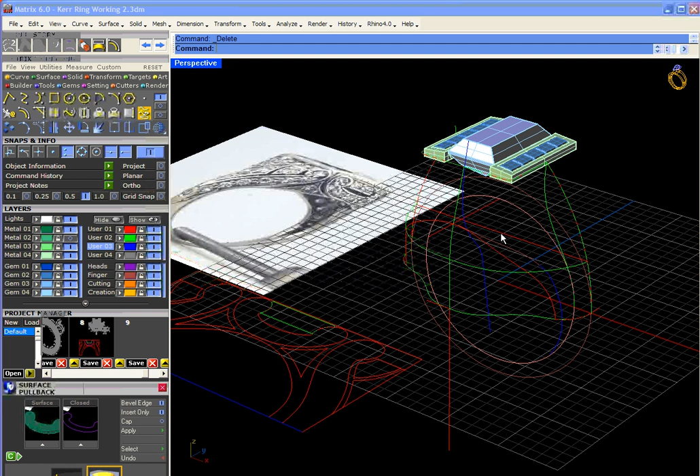Okay, here's a model, and it looks like there's quite a bit going on. Let me hide some of this.

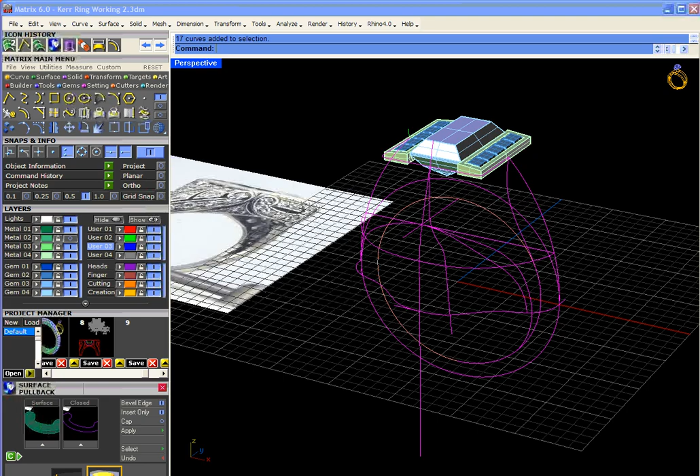But it's really more of the same type of surface modeling that we've been doing for a while. So let's look at the first thing we have. Let's go ahead and hide all this stuff too.

I've got the finger rail. There's a big, it's actually a big baguette. Here's the ring, here's the side view. Got a curly Q thing. Couple gems here.

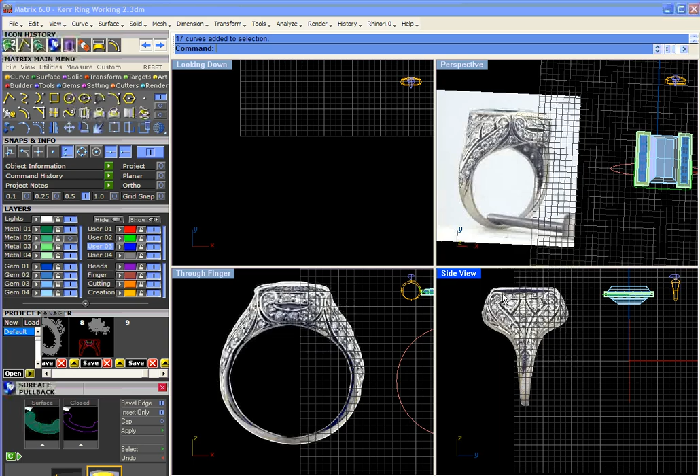So there's that there. There's a corner piece here, triangular, and then it comes down here. Another curly Q down into the shank. Got a center piece, a little section here, and then a bar across here.

Let's see, here's the top. There's the top there with emeralds in it. Okay, so there's what we're looking at.

And the whole goal of this project is to make a surface such that we can use flow along surface and put all this stuff up onto that surface, and not have to piece this thing together one section at a time.

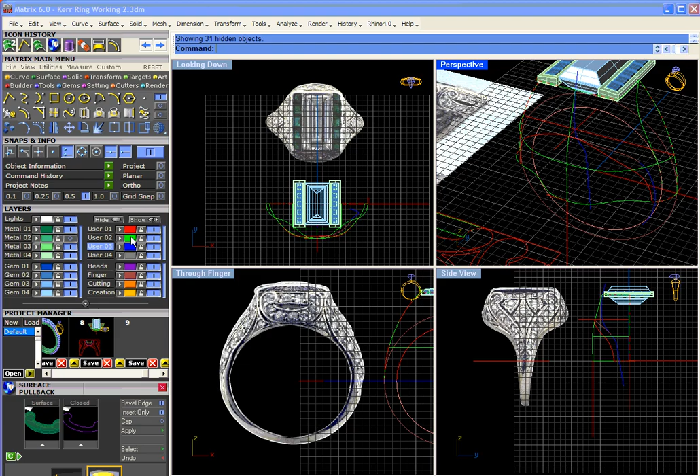So let's go ahead and hit show, and let's go ahead and turn off some layers here. One of the first things that I did is offset the finger rail, and I always offset that to the thickness right here. A lot of times it's 1.8. It all depends on what you're building.

This curve I didn't actually even use at all. Okay, so then...

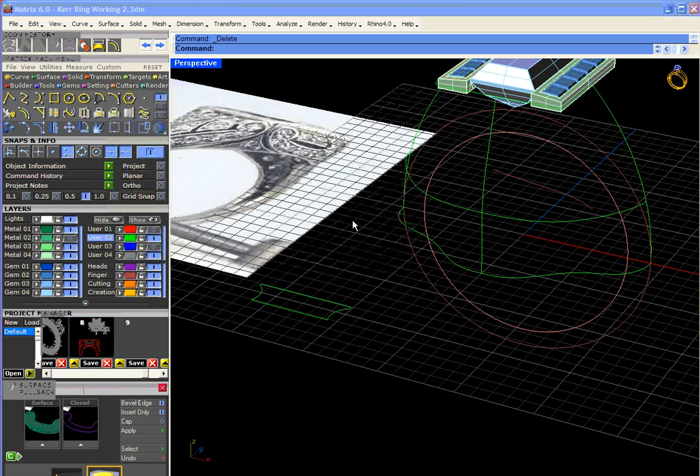We've got a curve that goes, here's how I always do these: arc direction, snap here, come up to here, and then hold down shift for ortho so that it comes tangent to this point right there, like so.

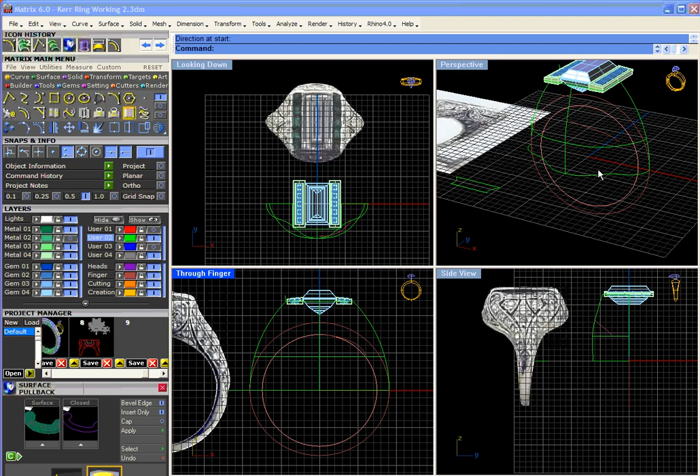Okay, and so there's that, and then over here, well, up on top is just a filleted corner, just straight over this way with the filleted corner.

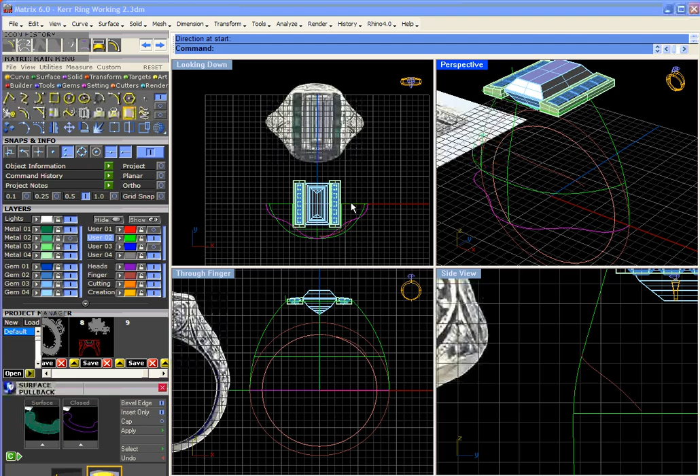Okay, then down here, this part is a little trickier, and in order to do that, it's another arc direction. I'm going to draw it over here. I start here, come over this way, ortho again, and then over here in the middle, let's turn on it, there's a tick mark here.

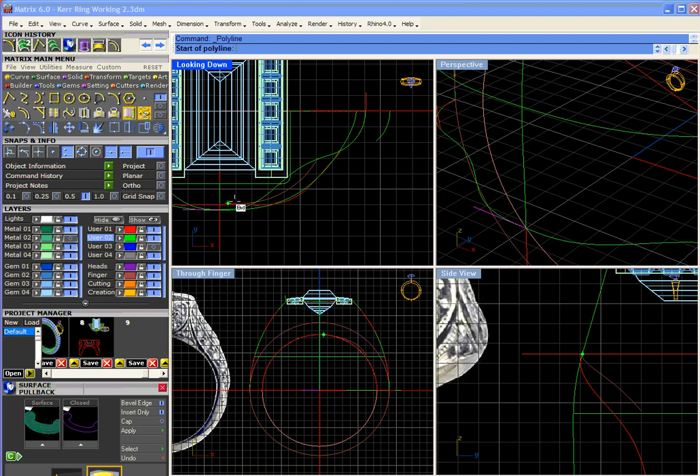So anyway, let me move this one out of the way. So there's that, and then over here in the middle is this tick mark, like so. And then we blend from here to here.

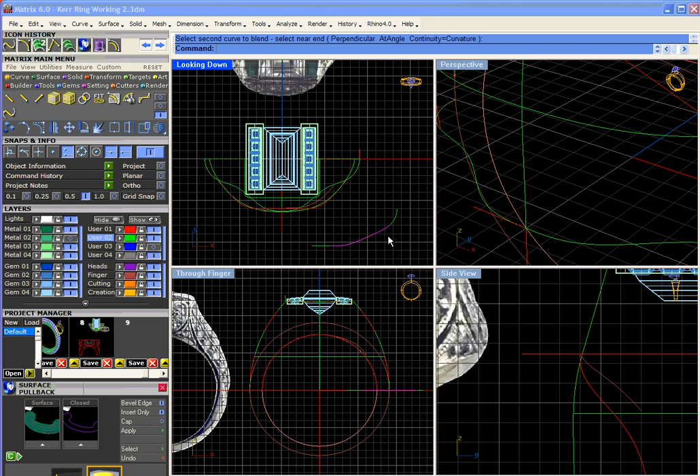And in this case, depending on how far over this comes, the blend actually goes in and back around, which is actually a good thing, because at the bottom I want this to be coming in skinnier.

Okay, so when you blend from like, actually it's from this curve here, when you blend from there, let's actually get rid of that one, there we go. So from in here and then blend over to this one, you get that.

Then what I did is I went ahead and did a blend from here, this curve, to this tick mark here, and you get this one.

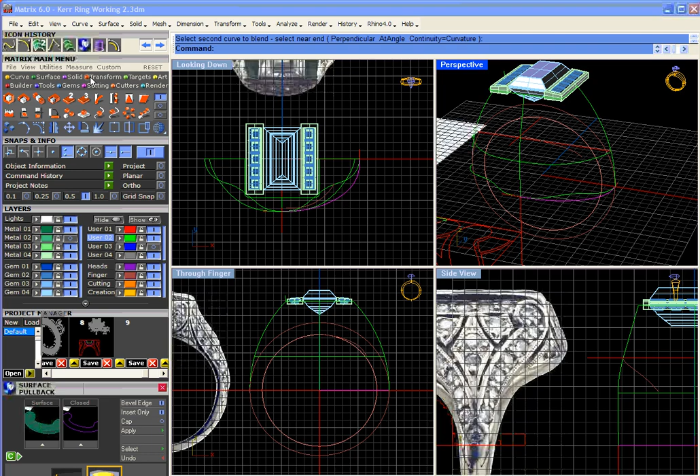And I went ahead and located it up here. And the reason is this, well, I'll show you. Let's orient that up there. Orient 2, 1, 2, and then it went up here from there to there.

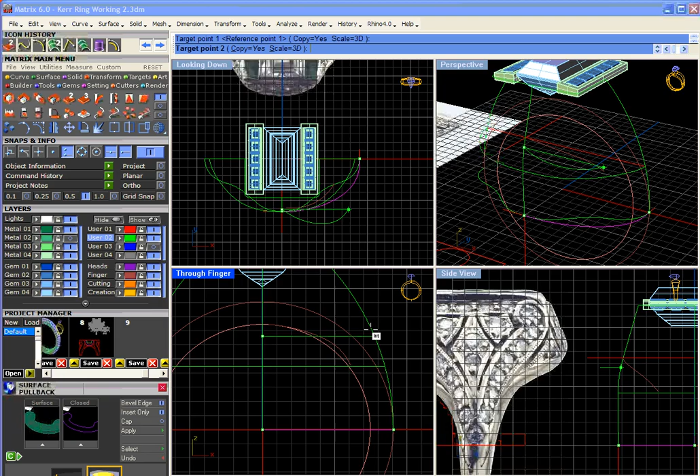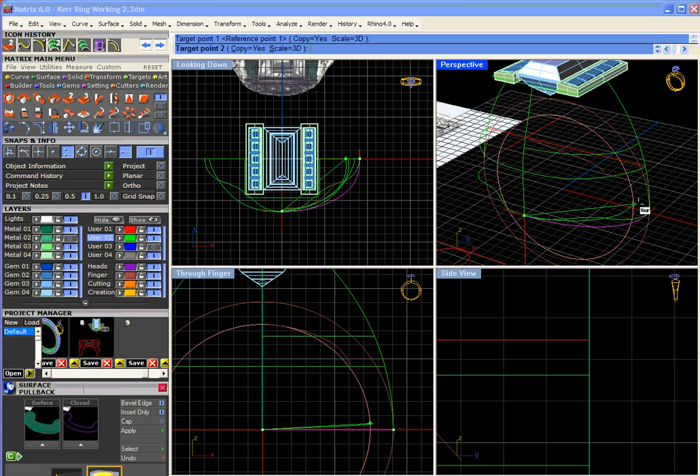Let's hold down shift for intersect. There we go. Alright, let's do that again. Let's go up here. I'm having a heck of a time getting that over there. There we go, get that straight there. Okay, so that's how I got that up here, like so.

And then, of course, I mirrored all this. Now, the reason that we do this section is this. Once we have this set up, oops, let's do that and that.

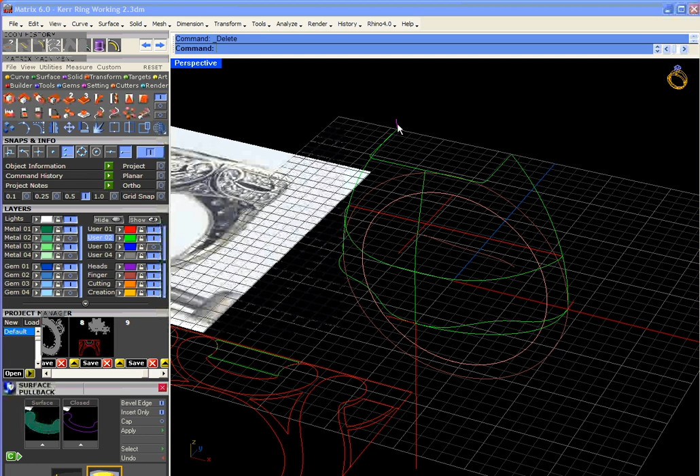All right, once we have this set up, we're going to do a curve network. I don't know what that is either. Okay, oh, and I also have a line that came down off here, this line here, and then I had a line drawn that way.

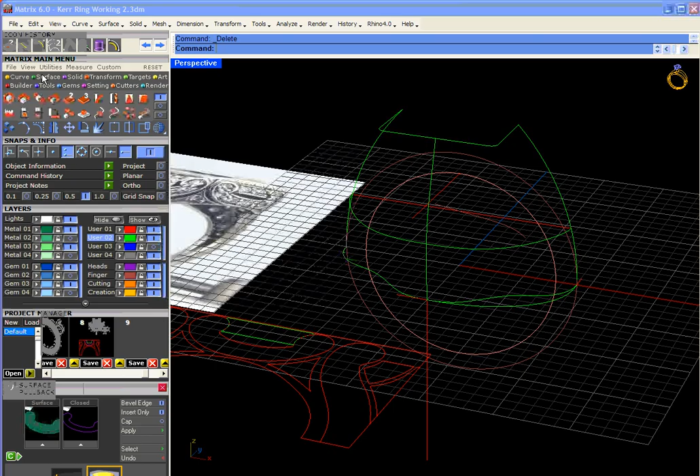Okay, and then this was a blend down to here. Now, if we do surface, you notice I'm working in 6 WIP too. I didn't really do anything in here that you couldn't do in 5.4, I guess, yet.

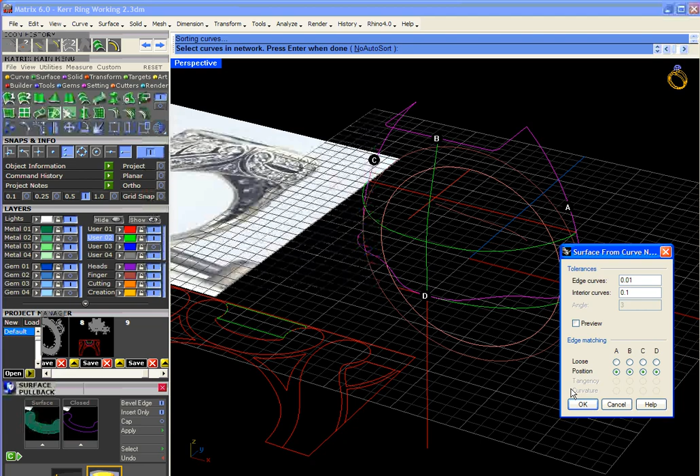Here's curve network, and if we pick this curve, this edge one, and this one, the original one, and hit enter, then we get this surface. And you can see that it kind of bows in and tucks in.

And that's really not what I want, because in the side view, it goes out. So that surface is no good. So then, this one's not the one I'm using. So then...

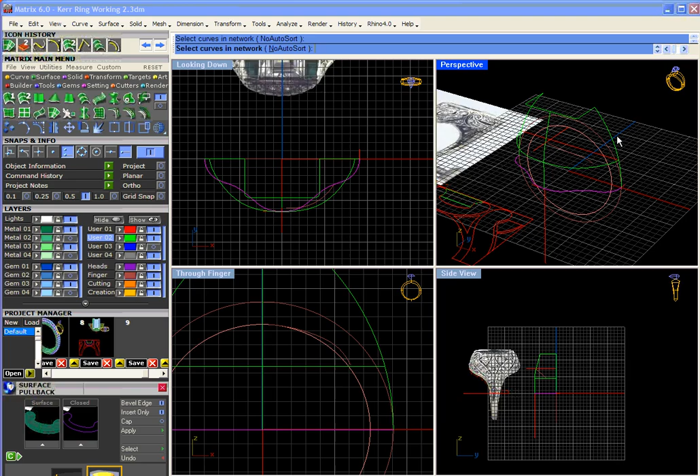If we have another line here and another line here, then let's go ahead. Now this one, we'll skip that one and show this. So there's this surface, and it does come out, but it comes out very quickly, and I don't get a good surface here for this triangle that I want, because this dips into this corner. So that's still no good.

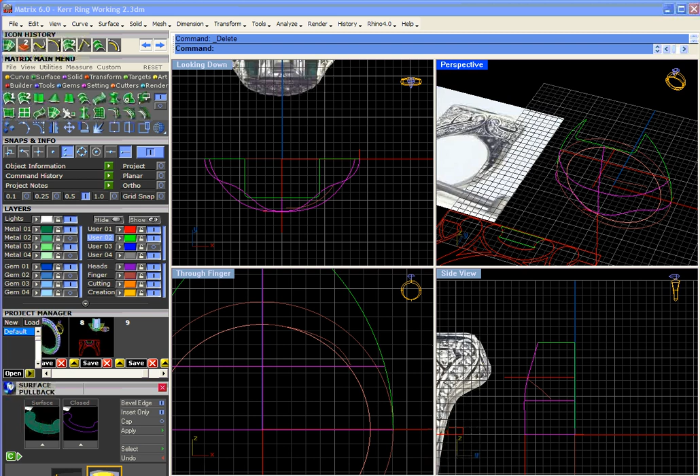So then I drew this one that we oriented just a second ago, so that it would bow out there. And so with all those selected, then it comes out more before it goes down in. So you see this is nice and puffy out here, and that's how that surface was made.

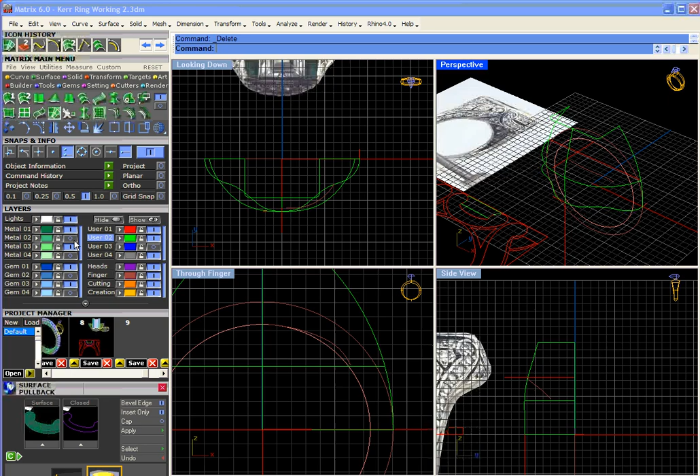And I think that surface lives on this layer right there. Yeah, now let's go ahead and bring this back.

The next thing we do is take and extrude this finger rail on out, like so. And then this one gets split by this one. And we split that, and that's how we got to this surface right here.

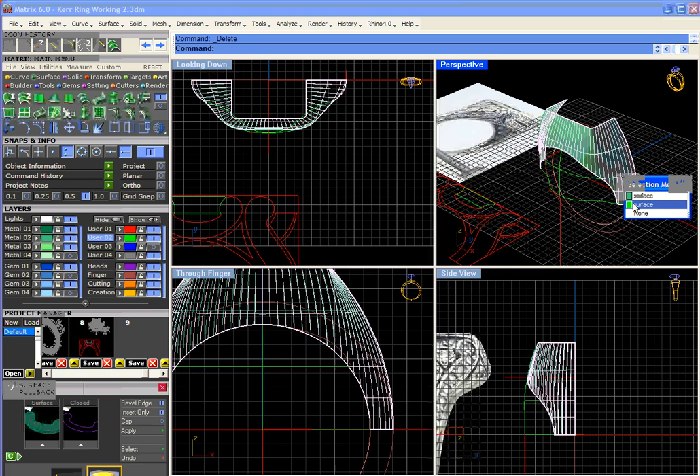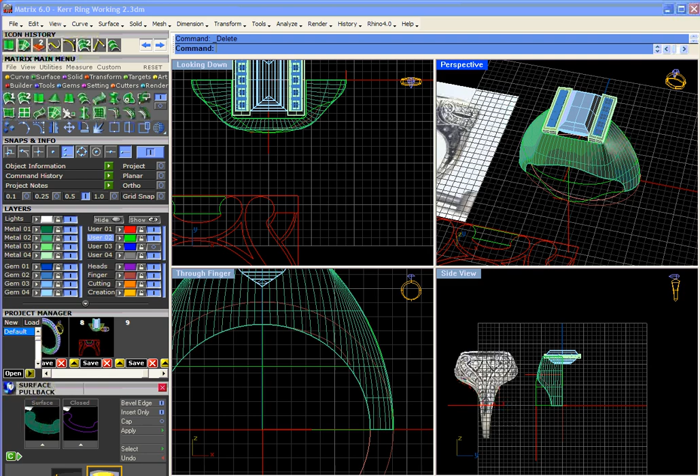So now we can see that we have this kind of shape here. Perhaps mine isn't quite as exaggerated, although I ran out of room. With the top that was already sent to me, I really couldn't go out any further. Maybe this bows out more, but not a whole lot. As a matter of fact, let's just see what we got here.

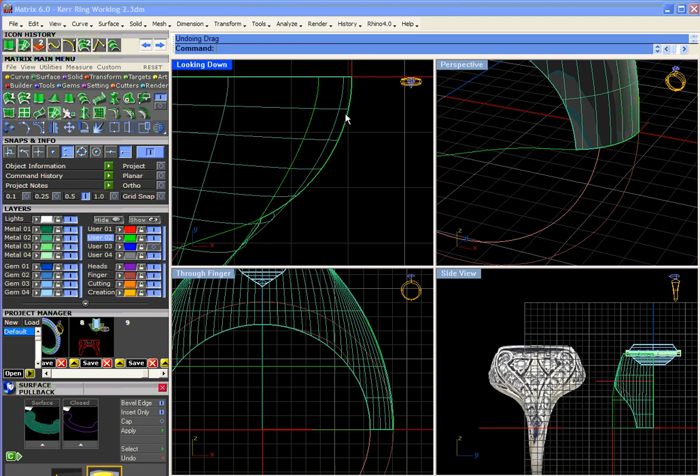Yeah, the dynamic is a little bit different, and it needs to tuck in more this way, which means that this curve here would need to be drawn shorter, quicker. Instead of coming out this gradual, it would need to come in quicker, which we could certainly do.

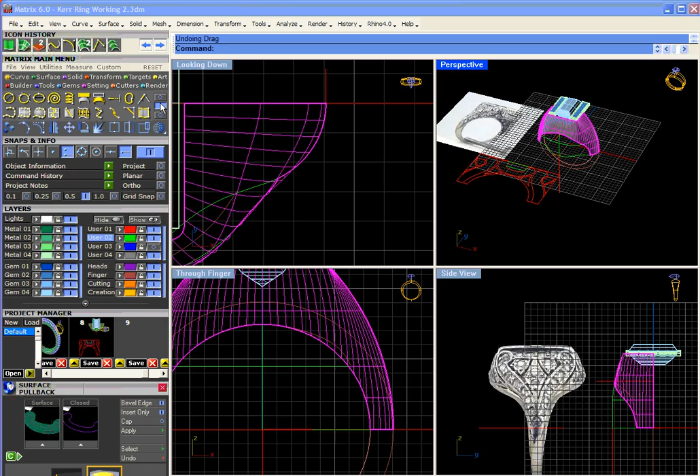Okay, so having done that, the next thing that we do is we select this and go to curve, and where is it, next one down. Here's create UV curves, so we select that.

So then we have two curves. We have this curve that represents the trim, and we have this curve that represents the overall surface. I don't need that one because the trim surface is what I'm heading for. Okay, then...

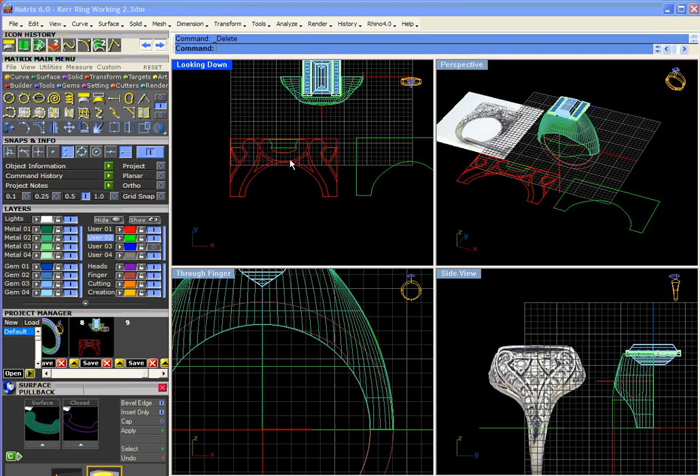We fill this shape with what we see here as far as all the shapes. So the first thing that I did is I like to just draw circles like so, to make something like this one.

And we'll go ahead and mirror this to the other side. Turn near off, turn mid on. And then it's just a matter of getting this right as far as, let's draw mid here.

Okay, and then we'll split this with a point at the quad there, and we'll go there, anywhere really, and then we'll blend from here to here, about like so.

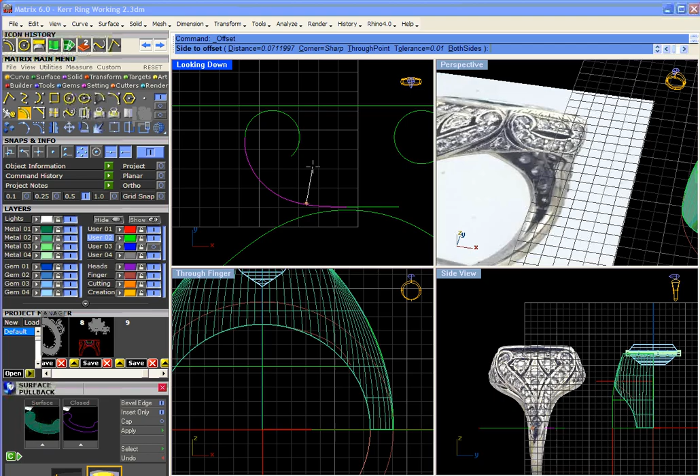Then we might have to turn on some control points or something to get exactly what we want. So there's that. Then I like to come here and come back with an offset, and we'll go T for through point, like so.

And then a lot of times what I like to do is draw a circle like this. And rather than use fillet, a lot of times I'll just control this with blend the way I want it.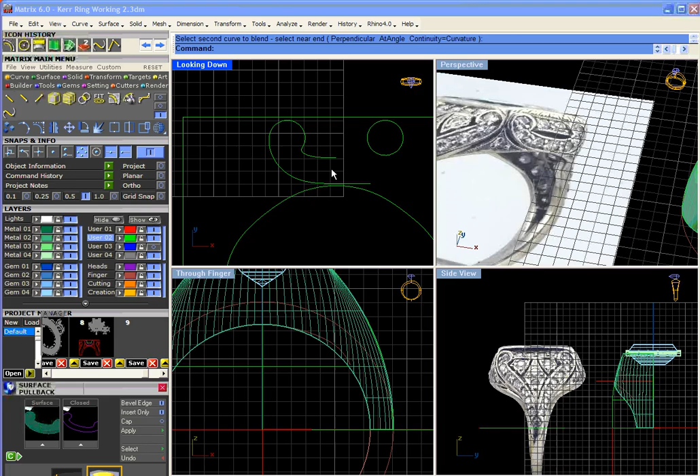So I use a circle to trim out a corner, and then I just blend it in there. And sometimes that's a better solution than fillet. All depends on what you're doing. So there was that. Then we mirror like so, and that's how you can get some of these shapes really pretty quickly.

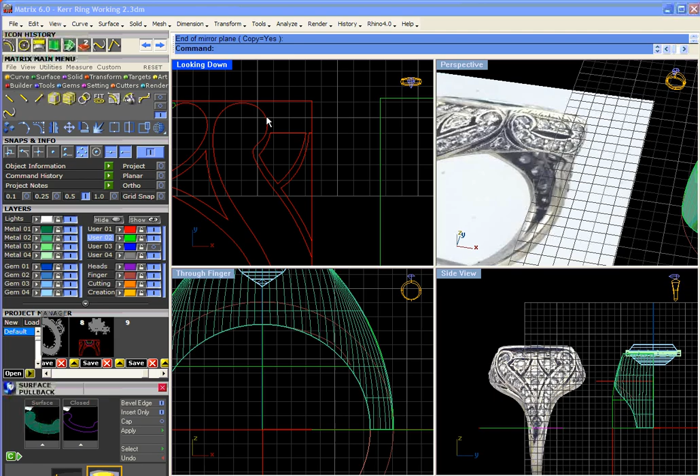And then to make like this triangle, once I have this piece drawn in there, and let's see, this is this piece here, and then this piece comes over and down in here, and it's kind of hard to tell on this thing.

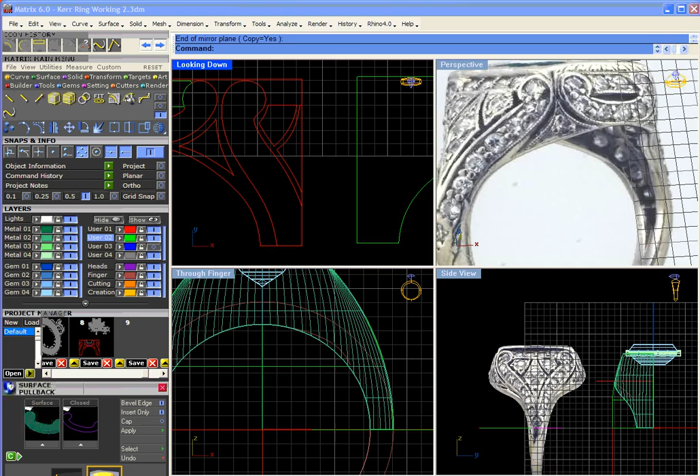It is pierced. Okay, so like this is a hole. This certainly appears to be a hole, but it looks like it ends right there. And so there's some holes in here that are pierced, but otherwise this is all metal, and when you look at it in the thumbnail you think, well, that's pierced, but it's not.

It's a dark reflection. And so there's metal, and you can really get a feel for how much metal is in there in this view. There's a lot of metal hanging out down in here holding this thing all together.

Okay, so but anyway, then what I did is I went in and, to make shapes inside of other shapes, you obviously use offset. So you just go through the thumbnail and you offset this one here, and then you offset this one here, and through a series of offsets and then a little bit of manipulation, then you can make this shape.

Okay, so there's the design laid out. The only one I don't have is this section here where there's 4 gems. It actually starts here and goes over and comes across and ends here.

So there's that, and really what we may want to do is, because pieces span across other ones, it may be such that we would want to do the whole ring. So let's take a look at that.

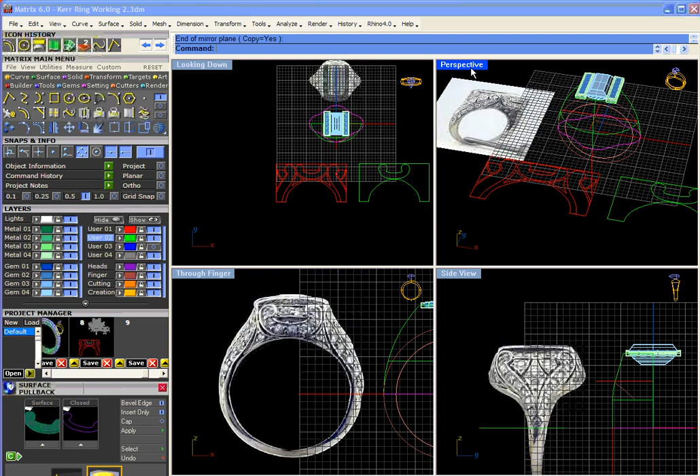You notice too, I'll take the time to say, if people have never used curve network, this is the best way to set up a curve network, with 4 edge curves. Okay, we got the 1, 2, 3, 4, and then you can put stuff spanning across inside it, like this curve and this curve, to define what the shape does. But anytime out here, if you get 5 curves, it doesn't work.

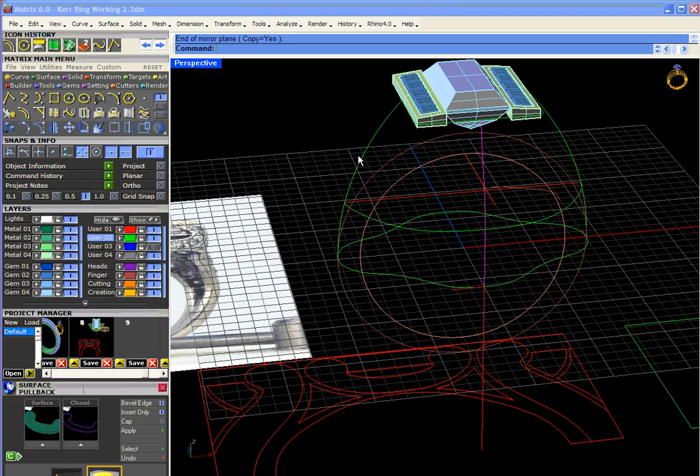The relationship is generally 4 curves. I mean, it could be 3 too. But now what we'll do is join that, mirror this, join that. Oh, let's do, yeah, mirror this.

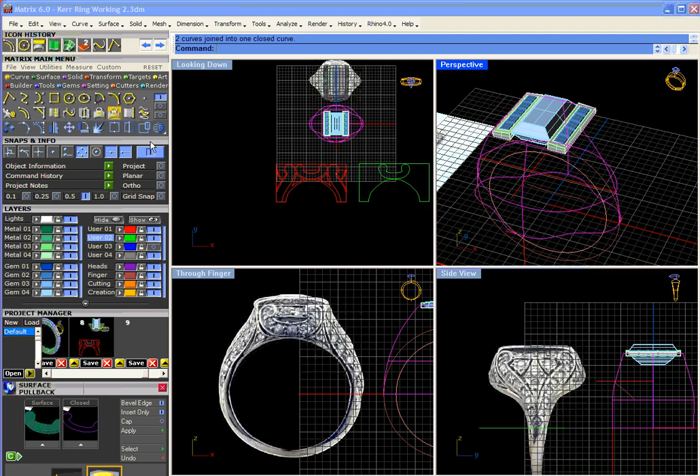Join that. Okay, so now we'll do all of this. There's the curve network, which is, of course, here.

So now, let's see, we'll extrude this out in both directions. This one gets split by this one. Gets split by this. Okay.

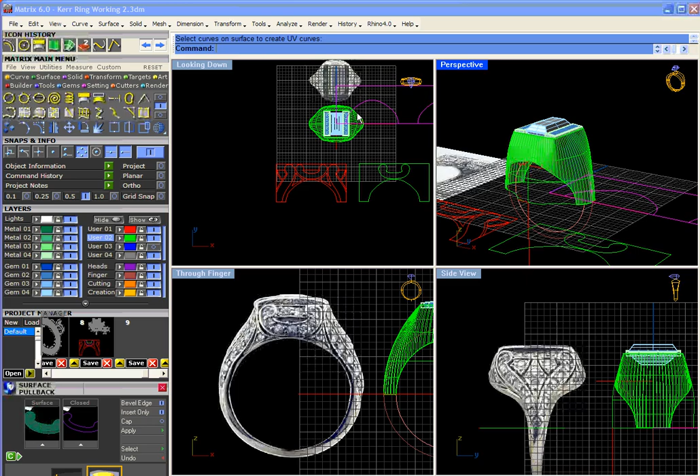So now we go to UV curve, and of course we have the same thing, only it shows both, like so. And we'll go ahead and put all this business in there. So let's go ahead and go duplicate from this corner to there. And then of course we'll duplicate from this corner to here.

And that doesn't look like that matched up at all. But let's see what happens. Okay, let's go apply up to here. Yeah, this one matches up. There must have been something wrong with the way I did that.

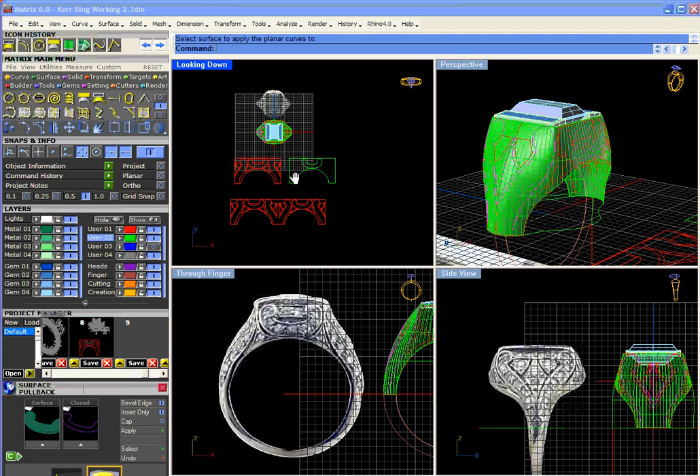Which makes me wonder if we take this and this and this and this, and that. Let's turn that off. Okay. Let's go ahead and mirror this to the other side and see what's going on.

Yeah. Well, we'll just need to fix it. Oh, I see, it is off. Let's just undo all that.

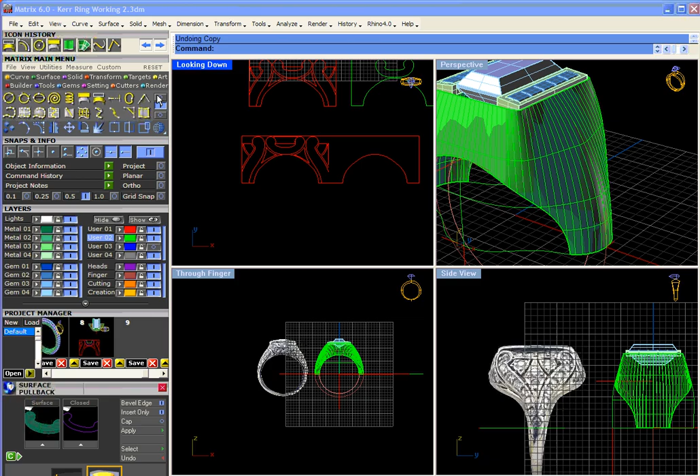And then we'll go ahead and draw a line from the mid of here. Yeah, there's where we're off. This doesn't equal this. So that's cool.

Alright, let's see. So we'll select all this business. And we'll do a 1D scale from this right there to this right here until we hit the intersect point right there. Okay. Yay.

We'll mirror this to the other side, like so. We'll explode that, explode this. There we go. Join that now.

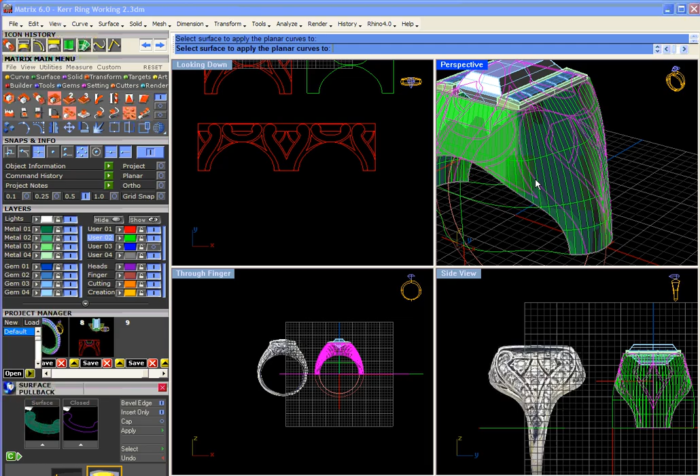And if we put this up here, put that on this layer. And there we go. There is that section up on there.

Then the beauty of this is that now we would go ahead and let's just do some panels here. Now the tricky part is that this has to keep going down and around here, which means we need their surface to come down further, but I'm going to mess with that in a minute.

As a matter of fact, I want to try this. This I have not tried yet. And with flow, we're going to use flow along surface.

Alright, let's go ahead and go blend from here to here, and that is going to be this shape here. Alright, and how far down that comes is up to us. And let's go ahead and blend that again from here to here.

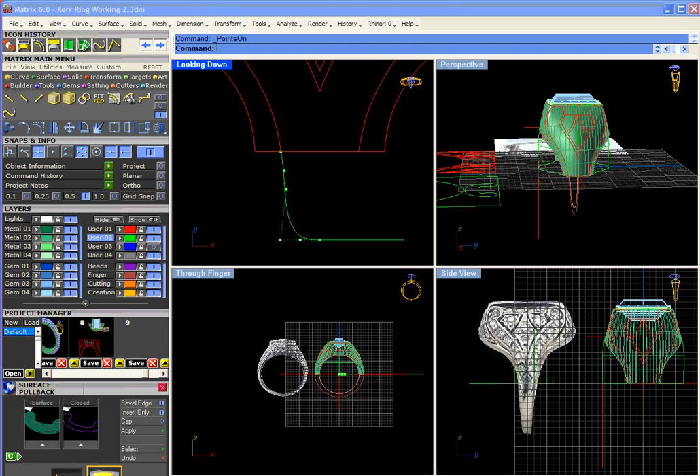There we go. And if we want this to be a bit pointier, then we just select those and do that. So there's that part. And then we mirror like so. Okay, so there's that. Join. Where's that? There it is. Okay.

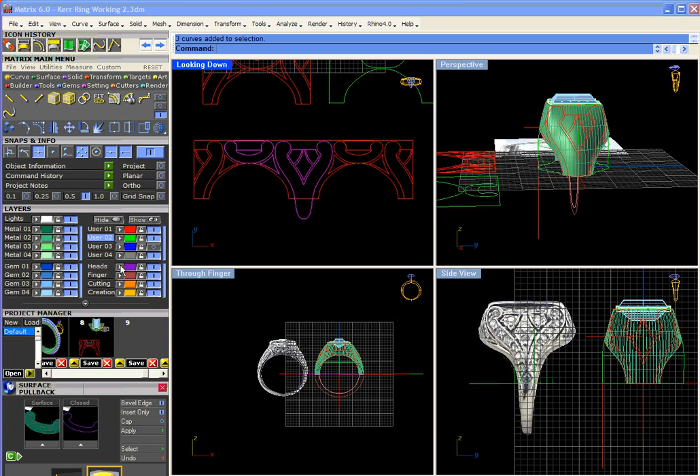At this point, we'll go ahead and do just what we need. So we need these shapes here. Those are the only unique ones. Let's put those on, and let's do orange.

Okay, so if we select these orange ones, and let's go ahead and extrude those, not both directions, but just one, and let's go -1 millimeter. I don't know if that's thick enough, but I'm not going to worry about it quite yet. Okay, so now we have that extruded down there.

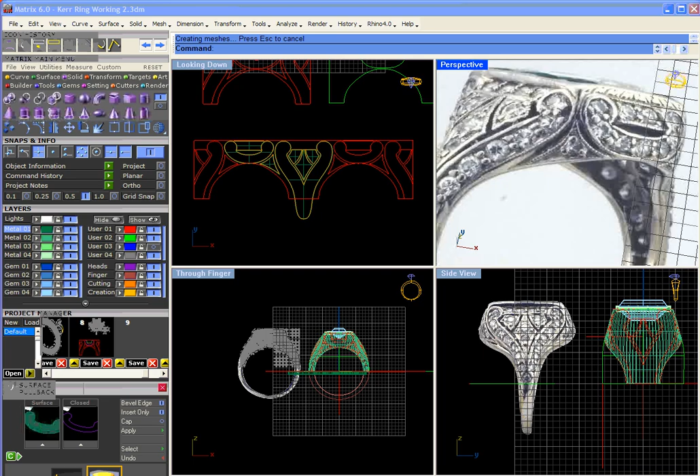And ideally what we would want, I think, is we have a lip going across here where the milgrain is, and then a wall that would slant down to a recessed pocket for all these stones to sit in.

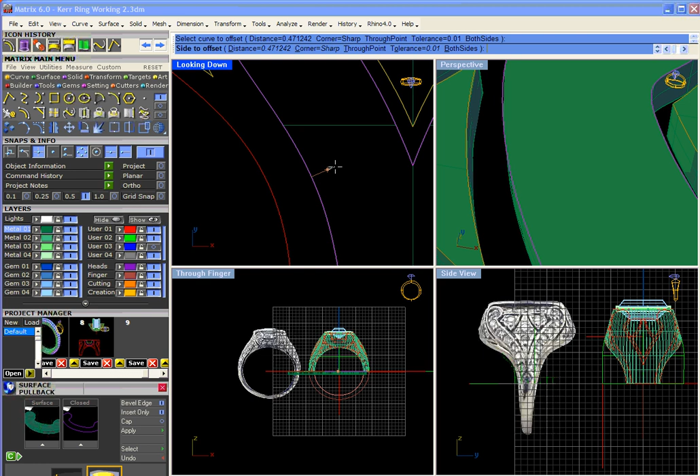Okay, so let's go ahead and select the orange, and we're going to offset the orange. Offset - oh, we can only do those one at a time. There's that. And let's pick a particular distance. Let's say 0.4. Okay, so there's that offset.

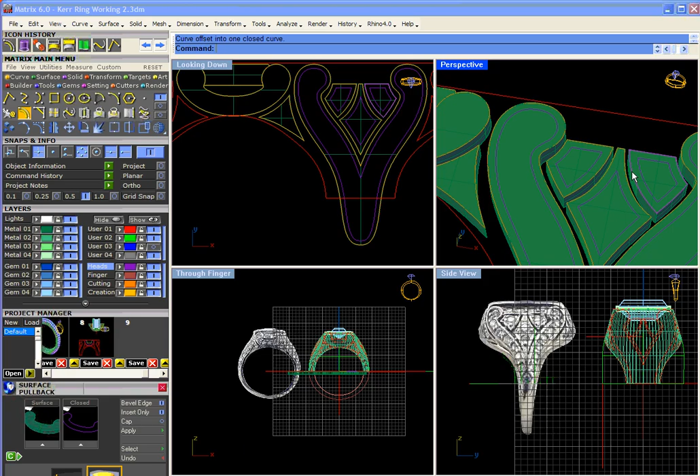And we'll go ahead and put that on purple. And then we're just going to go through here and pick each one of these and do the offset. Oops, let's put those on purple though. Curve, offset. Offset there. Offset this way.

Okay, then we'll take this purple one, and offset it again. Now here's the deal, that would be we do have an inset builder right here.

It's called surface pullback, and it works quite well on some more complex shapes like this one. It sometimes fails. Also, it has trouble with - it extrudes to a point, and so when you're using it way out here on a flat, the point that it extrudes to is far, which is a real drag, because then the walls of what you're doing all go in.

So unfortunately, if I was going to do them straight, it wouldn't be a problem. But I want kind of a draft angle to this wall, so I'm going to have to do these by hand. So let's go over and we're going to offset through point, and it's not a whole lot, just a bit.

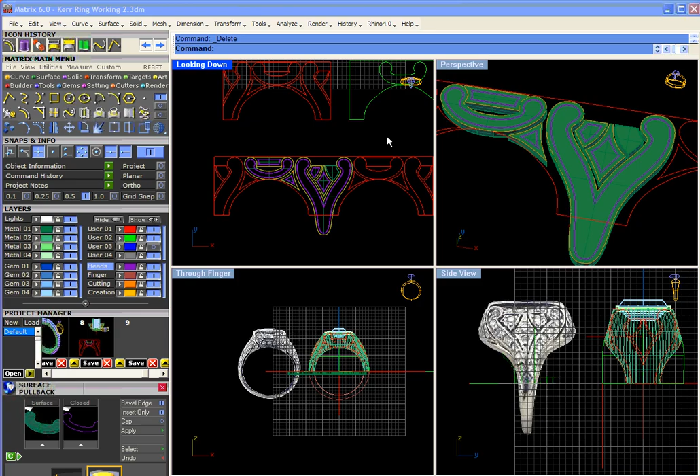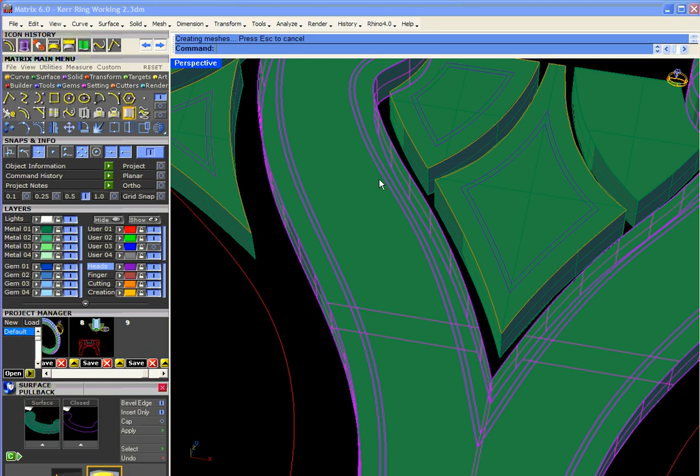Okay. So now what we're going to do is come in here and we're going to say that one gets split by this and this. Enter. And this one split by this. This one split. And so we're splitting.

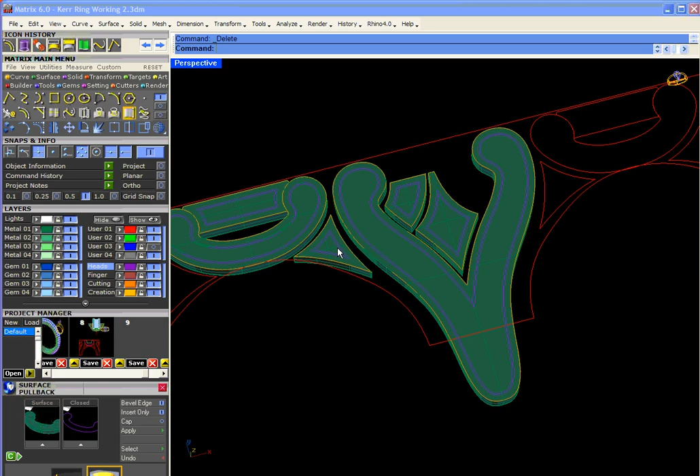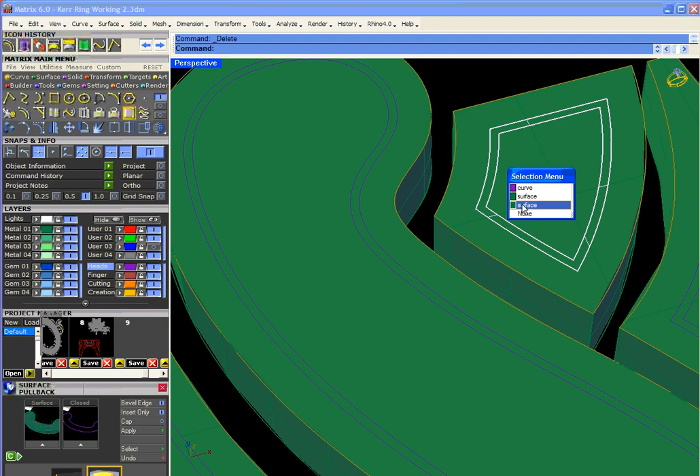Okay, let's get rid of that. At that point, we can get rid of this surface in here, like so. Did I get rid of this one? No, okay.